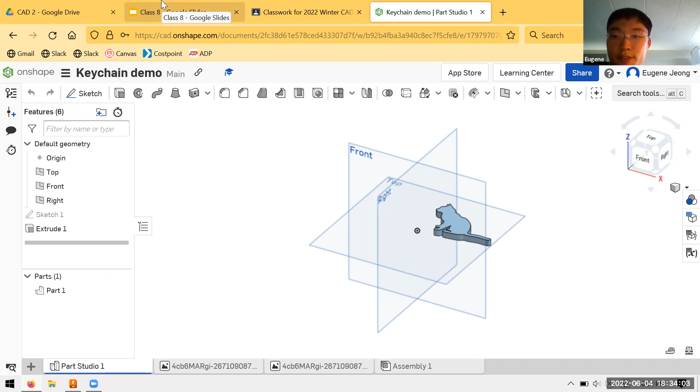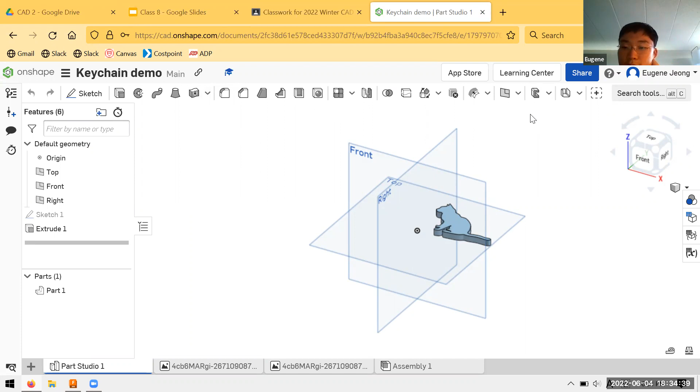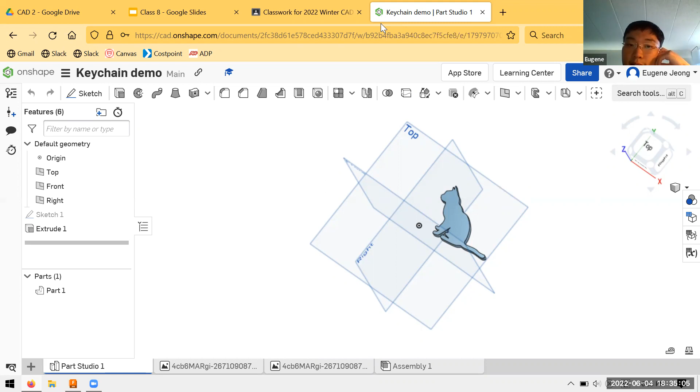All right. So before I get started with 3D printing stuff, I guess there's two of you here. Did either of you have any questions of things you want to see in CAD? It can be like how to use any of these functions, how to make a specific object or type of object, how to do something, anything like that. And if you don't have any right now, you will have another chance later. I expect there will be a bit of time where you'll just be working on the project. So during that time, if you come up with anything you want me to show you, feel free to ask. So yeah, just keep that in the back of your head.

All right, so last week we talked a bit, just starting to introduce the idea of using CAD and things to think about when you're designing a part for printing. Then we talked more about how you should consider using the 3D printer. We're going to focus today more on things specifically that you need to do in your CAD that will make it better suited for actually building it with a 3D printer. The main one there is related to something that I mentioned before, which is your minimum wall thickness. I'll explain a little bit more about some things related to 3D printing, but it'll be a pretty light day.

So we'll start off, if you're not familiar with how a typical 3D printer works, if you're getting something off the shelf, a household, desktop, hobby printer, it probably works by a mechanism like this, known as fused deposition modeling, or FDM. The way this works is the material that you're building the part with will come from a big spool of the base material, whatever plastic, PLA or ABS, and it gets fed into this nozzle here. So the source is that spool of filament, but when it comes out, the size of the deposited material is determined by the geometry of your nozzle. So the size of the nozzle has an impact on the quality and feature characteristics of the part.

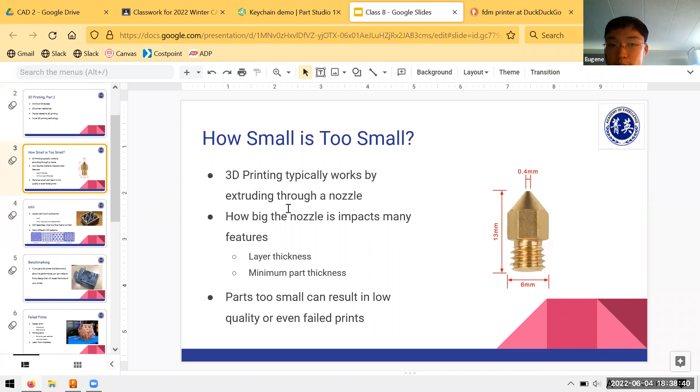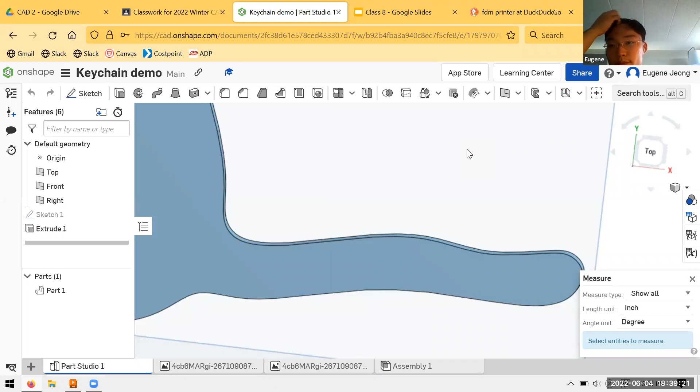So yeah, if you remember a couple classes ago, I showed you the measure tool, which is down here in Onshape. You just want to make sure that the thinnest features on your part have a minimum thickness that is greater than maybe a couple multiples of whatever your nozzle width is. That way, when you print, you'll have enough resolution with those lines to produce a faithful representation of the model, and also enough strength and things like that. Let's see.

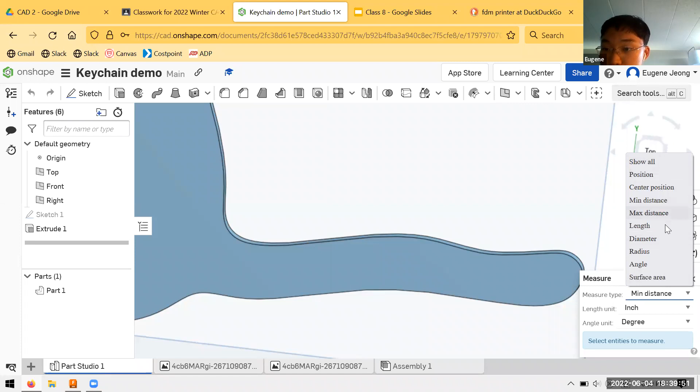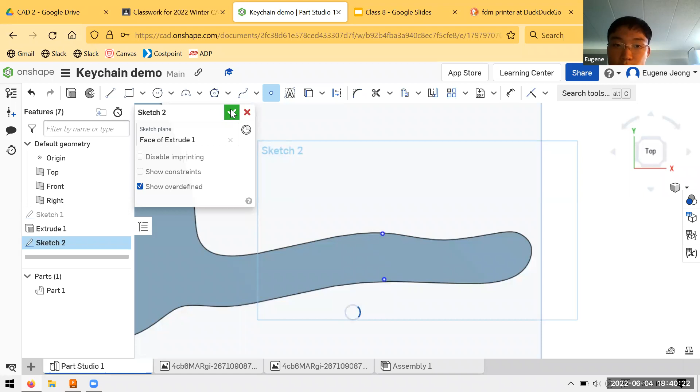So I don't believe Onshape has a simple point-to-point measurement, but if you ever need to know the distance between two arbitrary points, something you can do is just create a sketch. You can plot your points on the part that you want to know the distance between, for example, and if you're actually doing this, you'd make sure to constrain this to be on the part edges and so on.

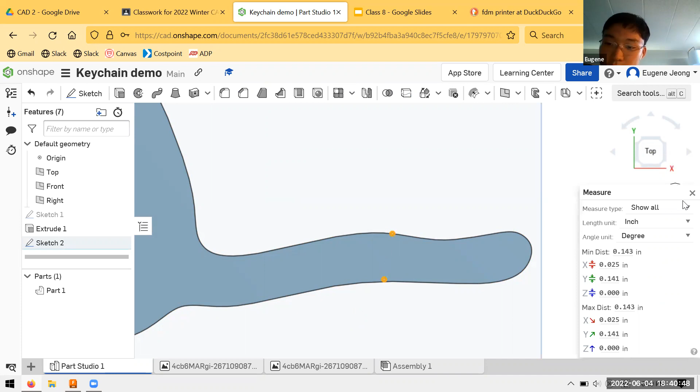And then you can just go back and measure, for example, the distance between these 2 points. There may be a better way to do it. There might be some kind of built-in point-to-point measure type of thing, but in the worst case, you can always do something like that to determine where your thinnest features are.

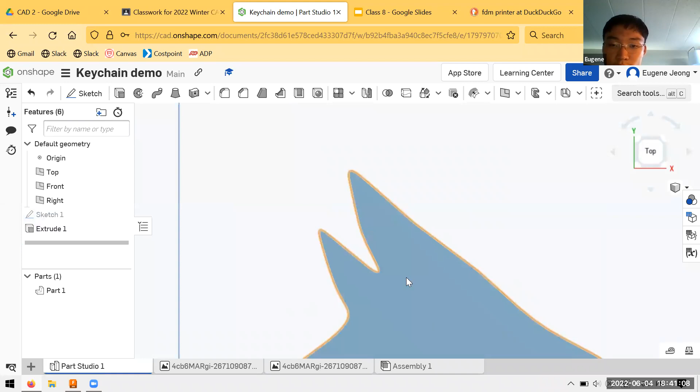Other things to watch out for are these narrow cusps. These might come out okay, but there's a chance around here the material might blend together. Likewise here, as I mentioned before, the ears might be a bit of a problem area.

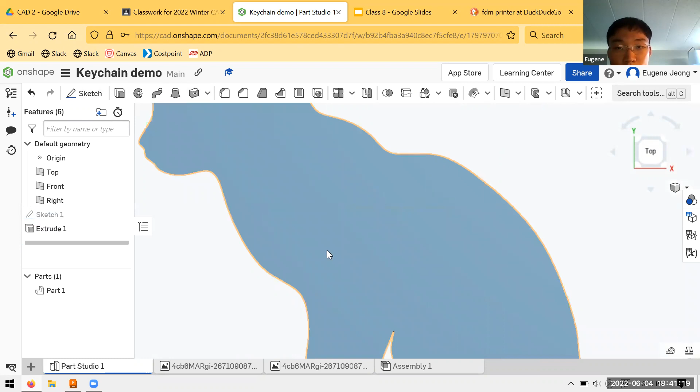And if you're doing things like text, if the text is too small, if, for example, you have some letters and the holes in the letters or the actual width of the letters is too small, then based on the resolution of your printer, it might just come out as a bunch of garbage. It either won't come out at all or it won't look the way that it looked in your model.

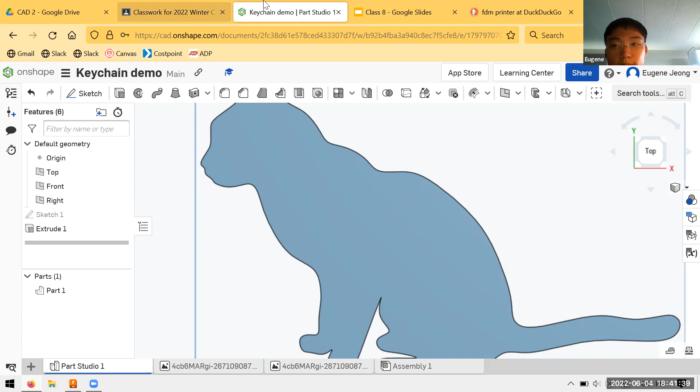All right. Here's something that I mentioned before. When you print something, most of the time, you're not actually going to print things completely filled, because that would use a lot more material than is usually necessary for most things. And it would be a lot heavier, right?

So there are some cases when you do completely fill in your part. For example, if you're going to be post machining or modifying your part after you print it. If, for example, you want to tap threads, which we talked about using a tap, then you would want to have a completely filled section so that there's enough material there to actually create those features.

But otherwise, you'll just have some different patterns inside, which is controlled by that program that I mentioned, the slicer, which is what prepares your 3D model for the 3D printer. It kind of creates a program that the printer follows to lay out all of those layers.

Here are some other things that are good to know about and that you might do if you ever have to operate or manage a 3D printer. One of these things is benchmarking. There are these artifacts that you can find models for. I think on Thingiverse, there are a lot of these print test artifacts that you can find if you search for things like that. The idea is it's a part that has a lot of interesting features that will reveal to you how capable your 3D printer is.

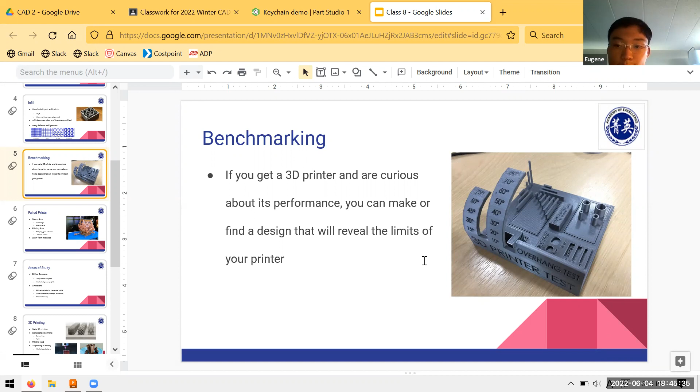Other things, I mentioned this last week, there are a lot of ways your prints can fail, and when it does fail, you might get something pretty catastrophic, pretty interesting looking though.

So there's a lot of reasons why that can happen. Things to look for: you want to identify where the problem occurred. What did you do wrong, and where did you do it wrong? It could have been during the design phase, when you're still in Onshape or whatever CAD program and creating your design. So you want to see, did I design something that isn't very good for 3D printing? Like no matter how I orient it, there's going to be these really severe overhangs. Or is there a feature that's way too small on some part of my geometry? Things like that. And you can consider modifying your design itself in CAD to improve how well and how quickly it can be printed.

Another thing that could have happened is that the error happened under the umbrella of printing error, when you're still in the slicer program. So you've already got your model file, you already have your 3D design, but you're preparing it, you're telling the printer how to print this thing. During that stage, it's possible to make some poor decisions or make some mistakes. For example, things like print orientation. We talked about last week how you want to consider things like which way the layers will be and how that affects your material strength, or how quickly it'll print, depending on if you have a really tall part standing upright or laying flat on the table. So you can have some printing related errors at that stage.

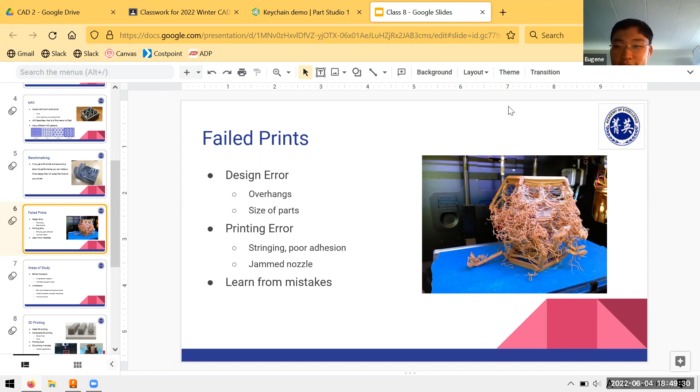All right. If you're interested academically in the idea of 3D printing and things related to 3D printing, there's a lot of controversy, which you may or may not know about. Not everyone loves everything about 3D printing. If you're interested in reading about these kinds of things, you can find a lot of literature and media about 3D printing of weapons. When you can't really control what people make with their 3D printers, of course, there can be some bad actors who try to make weapons with 3D printers.

Another thing is intellectual property rights. You might be familiar with things like copyright law, with patents. For example, the reason you can't find every book ever written online is because of intellectual property laws. And in a similar way that books and people's writings are protected, so also are people's designs. So there's a lot of talk about what we can do about people who try to 3D print things that aren't their intellectual property, that they technically are not supposed to print, but they're able to print nonetheless. As you can see, there's a lot of ethical implications related to 3D printing.

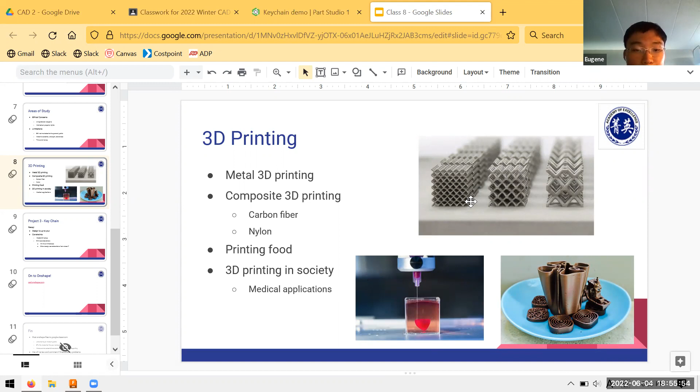All right, so do you have any questions about things related to 3D printing? If not, I'll give you some time just to work on your own on your keychain project. And you don't really have to think of it as a keychain per se. It's just more of a free design project for something that you could potentially 3D print. So I do want you to think about things like your minimum wall thickness and total size. But beyond that, just try to do something interesting.

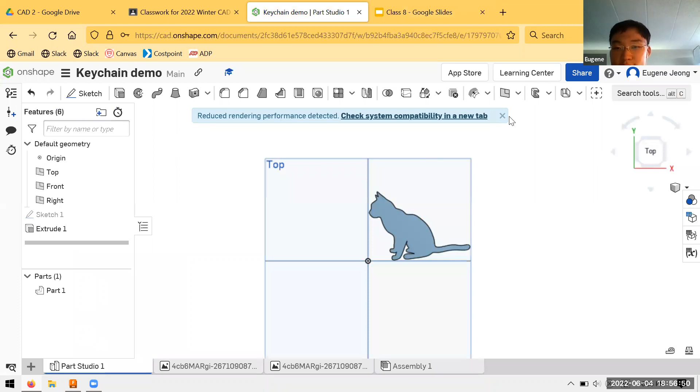Try to challenge yourself. If you're already finished with your keychain or you're happy with what you have, just try to make something. Personally, when I was first starting to learn CAD, what I would do is just look at random objects around me on my desk, things like my computer mouse or my phone, and just try to model those, try to recreate those as closely as I could in the CAD program.

So at the end of the class, since this is our last class, I will spend a few minutes talking about where to go from here, or how you can keep learning. But for now, just try to model something interesting. So I'll give you some time to do that. And while you're doing that, I'll prepare a quick little demo in Fusion, which hopefully works. And I'll also try to upload these slides, which I was having some trouble doing earlier. So work on that for now. Let me know if you have any questions, and I'll be back with you in a few minutes.

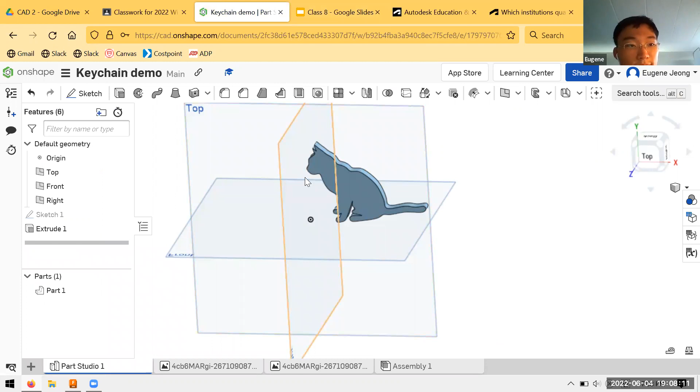All right. So does anyone have any questions about CAD in general, about Onshape? Do you want to share anything that you've made? And it's all right if you don't. All right, so hopefully you're more or less wrapped up with the project. I don't know if the AOE Center has some plans. I guess if you can go there physically, you can ask about possibly printing your part, and whoever's running the printer there can help you with that.

I'm going to take a moment to do a quick demo, and I'll show you an example of how a slicer program might work for 3D printing, and I'll show you a few options that you might have for how you can do CAD that's not Onshape.

So I guess one option, which I'd say is pretty good and should be free to you, is made by a company called Autodesk. So you can just look for Autodesk. They're pretty famous. They have some pretty well-known products like AutoCAD and Inventor, which you may have heard of.

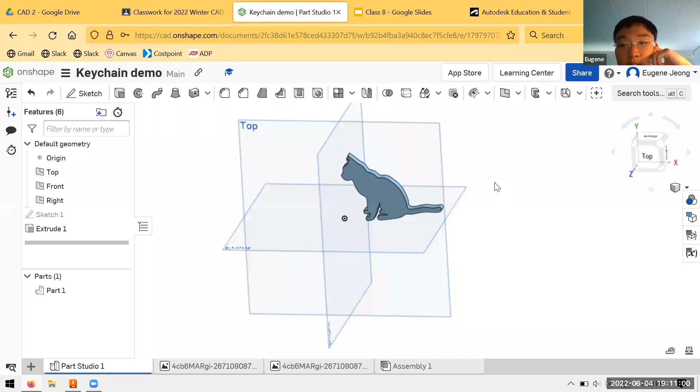Onshape is very unique in that it's all built into the browser. I think it's the only one that has something like that. Kind of think of it like the Google Docs of CAD programs. But in almost all cases, these CAD programs that you'll work in will have their own application, right? They won't be in a browser like this. So if you're interested, one thing you can start out with that's free is Fusion.

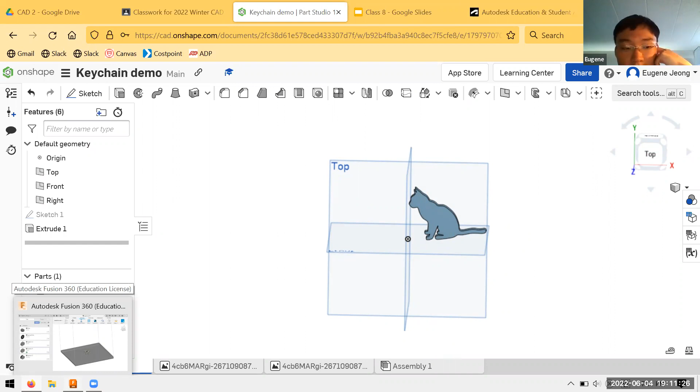So hopefully you can see this on my screen. This is kind of what it looks like in here. I have something up for something else, but Fusion, kind of similar to Onshape, has an integration with the cloud. So your files are kind of stored on their servers. You have access to all your files on whatever device you're using it on, which is different from a lot of other CAD programs, which rely on actual files on your own computer or network. But Fusion is kind of on the cloud.

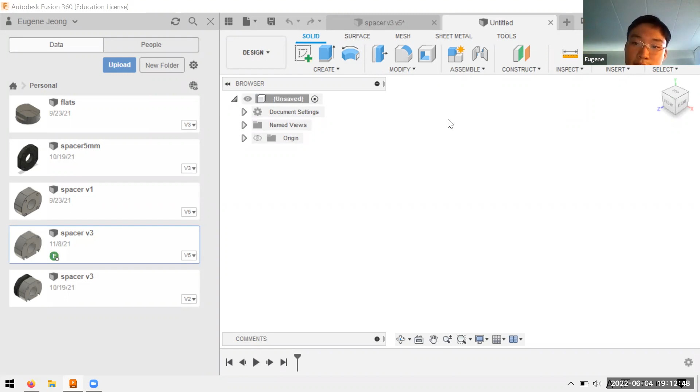So you can see this is kind of the design space. This is my document or my part studio, if you were to compare it to Onshape. So you can see it looks really different from Onshape, but the things that you can do here, the way that you create parts, is pretty much the same. And hopefully this shows you that with the skills you've learned so far, after you learn the basic movement controls and commands, you have all the knowledge you need to continue modeling things at the level that you're able to in Onshape or any other program.

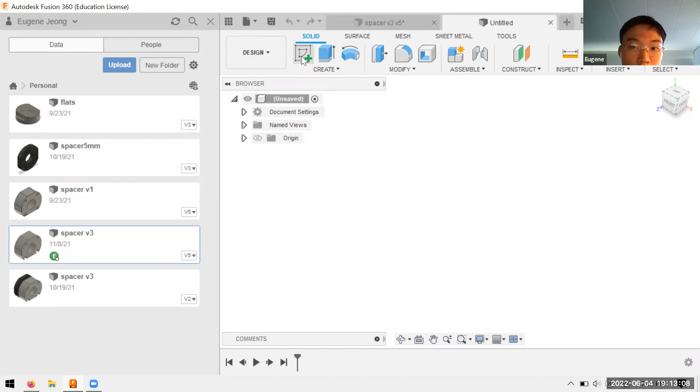So here you can see there's my navigation cube. It looks a little bit different, but I can move things around. I can pan. I can select things, zoom in and out. And so, hopefully this is very familiar. The first thing I can do is create a sketch, same as Onshape. I pick a plane to put the sketch on, and then I have my tools. These should be pretty familiar to you.

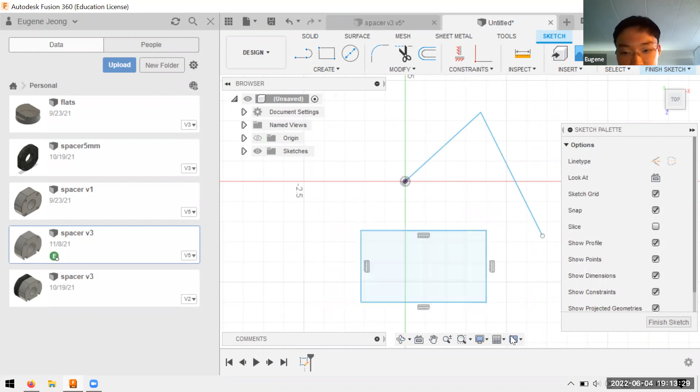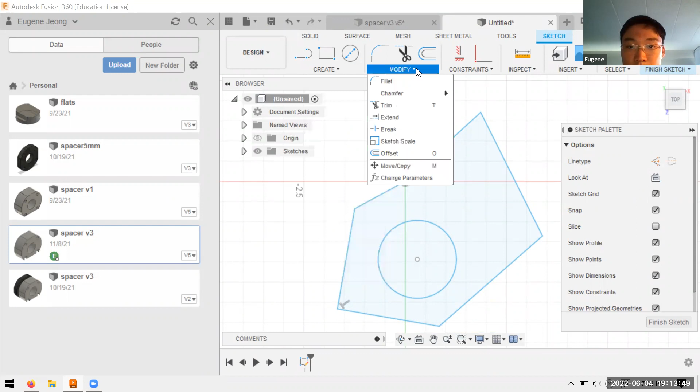This is my line tool, it makes lines. I have my 2-point rectangle tool. It works exactly the same as the Onshape one. I have a circle tool. And as you keep looking through this, there's a whole bunch of tools that are, as a sum, achieving the same thing that you're able to achieve in Onshape, right? So I can finish my sketch.

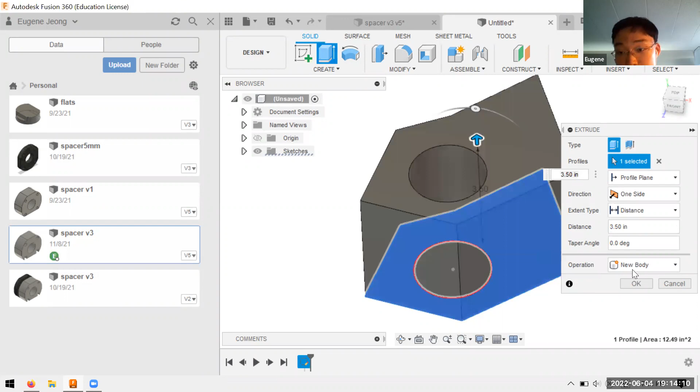Then I go back to my 3D workspace. I have my tools here. Extrude, revolve, they work exactly the same as they do in Onshape. It's just the interface is a bit different. So I select my region or sketch profile, and then I can extrude it to some depth that I want. And that's how I create my 3D bodies. So nothing I did there should have been that revolutionary to you. Everything looks different, but the things that you're doing are the same.

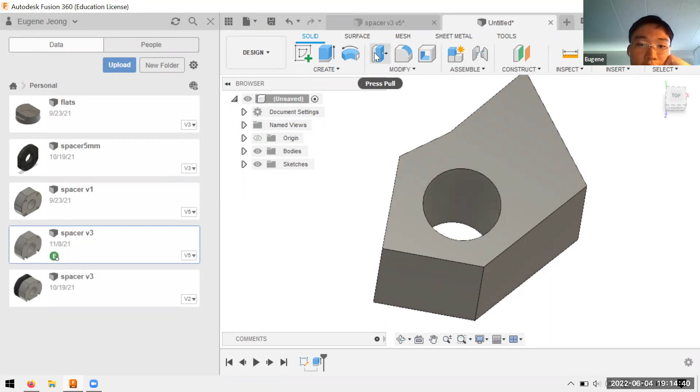So once you start using CAD for school or your other competitions and you're not using Onshape, whether that's SolidWorks or NX or Rhino, Creo, CATIA, there's all different kinds of programs, but more or less they work in a similar way. You can see I have my fillet tool.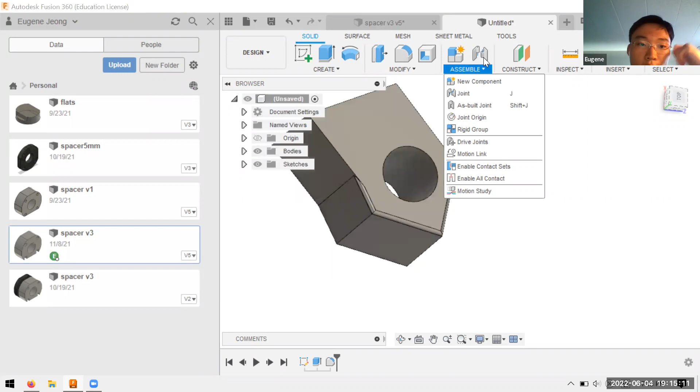It does the same thing, creates fillets. I can do assemblies. The Fusion assemblies, in my opinion, is a bit weird, but it's the same idea where you have, they call it joints, but you're just creating rules. You're creating restrictions on how your components are allowed to move with respect to each other. There's a measure tool, just like the Onshape one, that tells you things like distances.

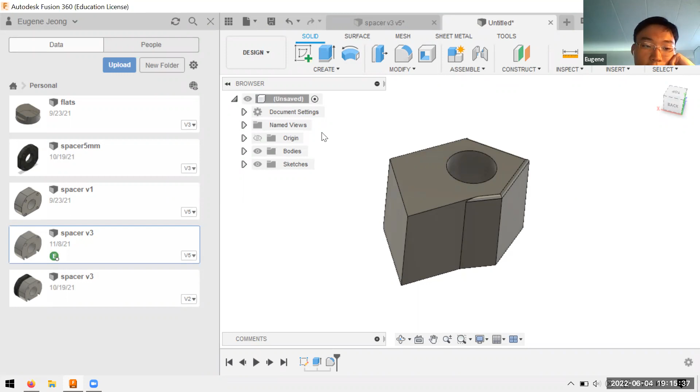So that's that. This is something that you are able to do. As long as you're a qualified student, which I expect you are, you can use this.

One other thing I wanted to show you is how a slicer program works. So one of the cool things about Fusion is that it has built in a pretty solid CAM package, computer-aided manufacturing. So we talked about 2 weeks ago, for manufacturing, if you're trying to program a CNC machine to make your part, you need to create a program to tell the computer what to do. And so I personally did use a bit of Fusion to control CNC machines while I was at school.

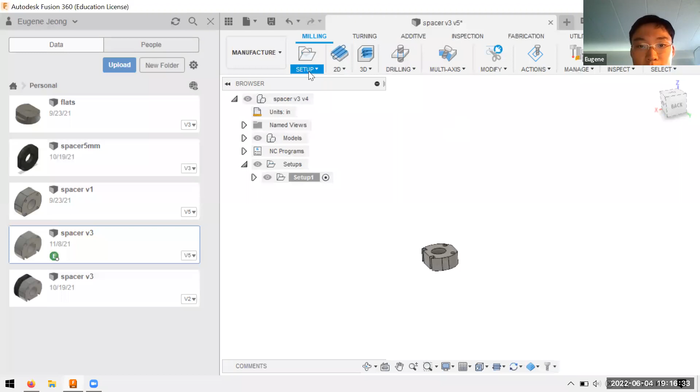It turns out Fusion also has a 3D printing slicer of sorts. So this probably won't be your slicer of choice. There's probably a lot of other slicer programs that might be preferred by whoever owns your 3D printer that you'll be using, but just to show you what it does, just to show you the ideas.

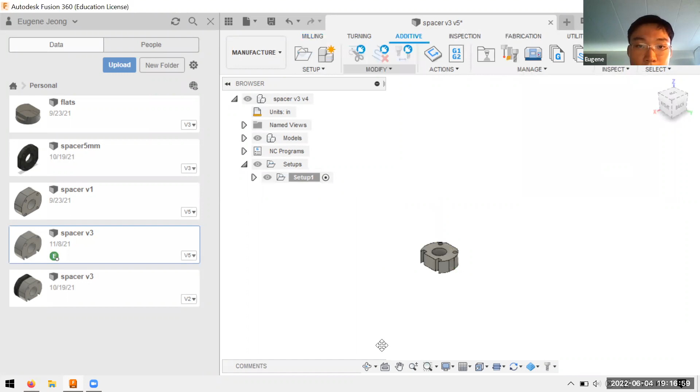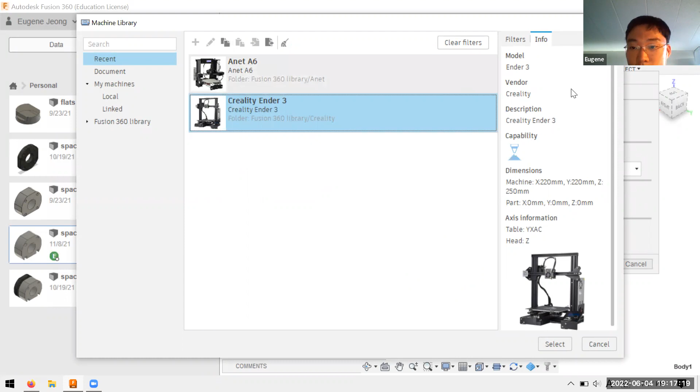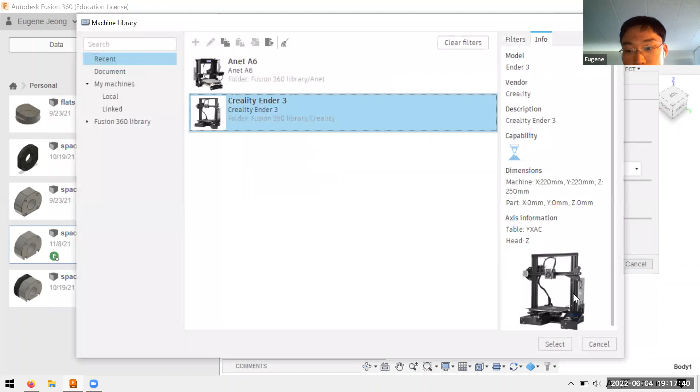I can select the 3D printer that I have. I don't actually have these 3D printers. They're just some default options that show up, but you can either find or create the specs related to the specific 3D printer that you have. And once you do that, whoops, let me do that one more time. I can select it for 3D printing. The operation I'm doing is additive manufacturing. I hit OK, so that creates my kind of work setup.

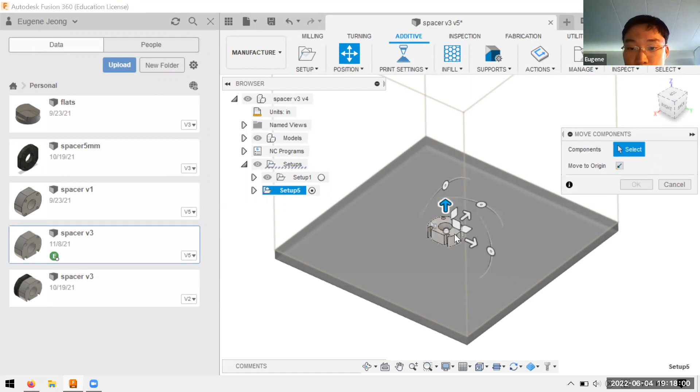And then what I need to do is arrange my part where I want it to be printed on my build plate. So I can move it around. If I'm doing multiple parts, maybe I want it to be off in a corner. I might want to rotate it. For example, if I think mechanical strength is more important in the x direction, if I'm trying to resist blows in the x direction, I might want to print it something like this.

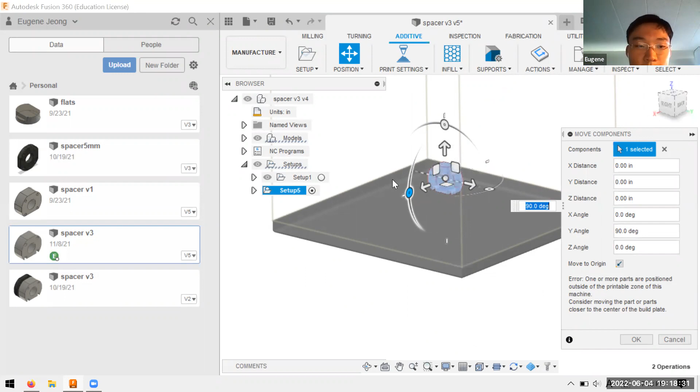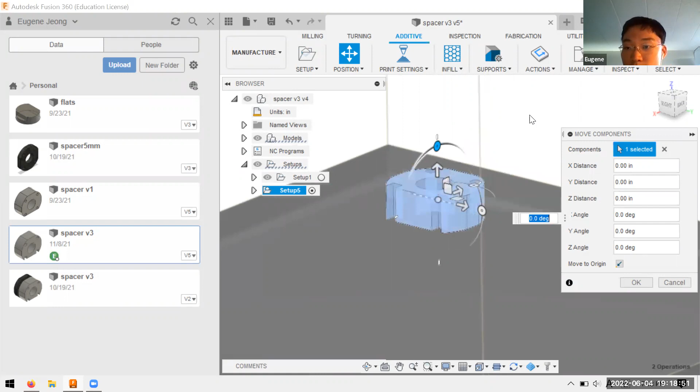But as you might realize, the fact that all these holes and things are here means that the best way to orient this thing is probably lying down on its back like this, because that just means that every cross section is going to be the same geometry, right? So you can move around your part, you can orient it how you want. Then you want to make sure that the part is touching your platform, which for me it is already.

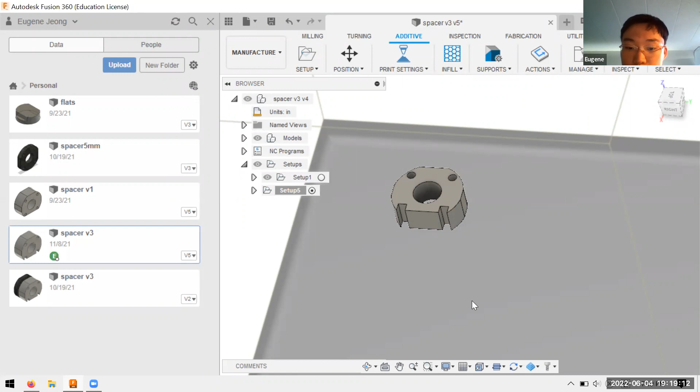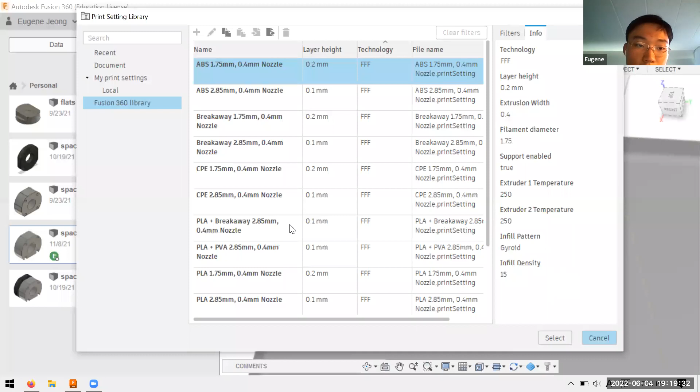You can control things related to your printer. So let's see. Hopefully you can see the dialog box that pops up. You can specify basically a bunch of things that tell the slicer program about your 3D printer, right? Your 3D printer is going to have all these different properties, and the slicer will make various decisions for you when it's creating a program based on what it knows about your printer.

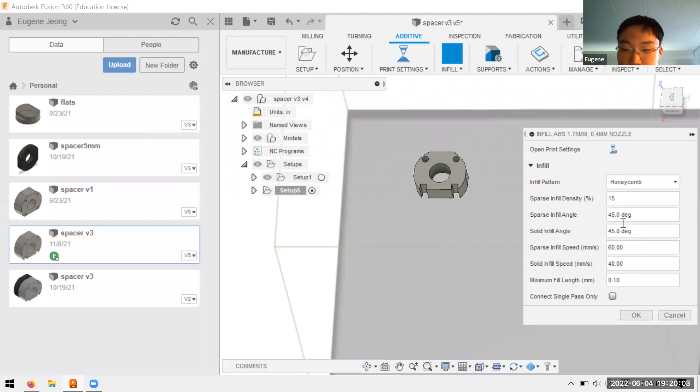Infill is something we talked about. So you can say, what kind of pattern do I want the program to use in the filling shape. So I can specify how densely filled the part should be, the raster angles, things like that. Here, things like supports, rafts, additional things that aren't built into the basic geometry, but still might be necessary for the print itself. I can place supports if I have overhangs.

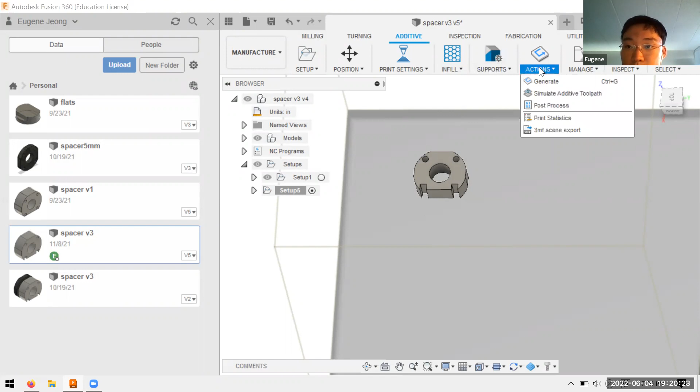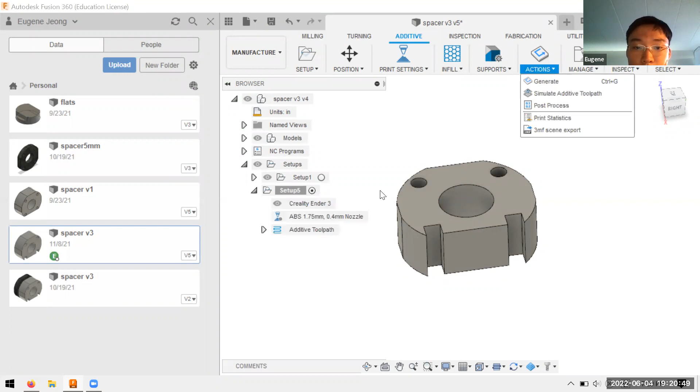And then you just tell it to create a program. And what this slicer program is going to do is generate this code that your 3D printer is then able to accept and execute to print this part. What's neat is that Fusion lets you simulate things, which is really handy, both for the machining thing, and it's pretty cool to look at for the 3D printing thing.

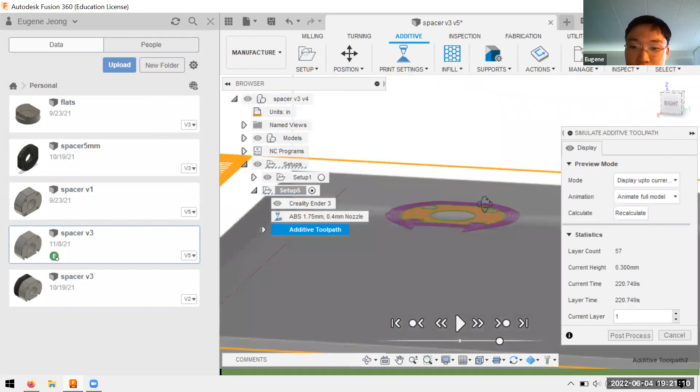So you can see layer by layer how the 3D printer is going to build up this part. And if you've never seen a 3D printer working before, hopefully it gives you a good illustration. It doesn't show the 3D printing head or anything. It just shows you how the printer deposits material. So this is going way, way faster than it would in real time.

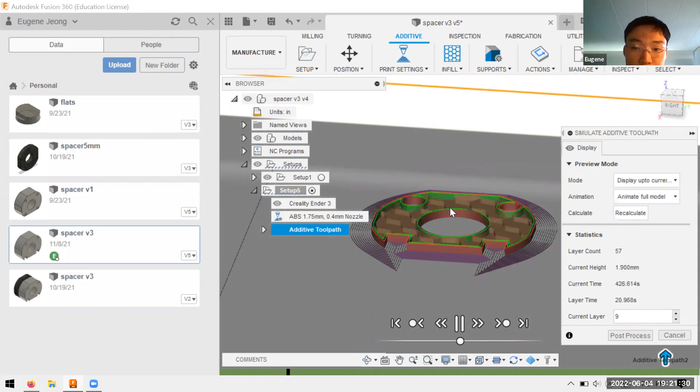You can see every time more material is being added, it's being highlighted. You can see it's just tracing out these shapes. It's filling in the inside with the honeycomb pattern, which I told it to. It's just going up in Z one layer at a time. I'm just continuing to work on this part. And during this whole process, I can look inside and see what's happening.

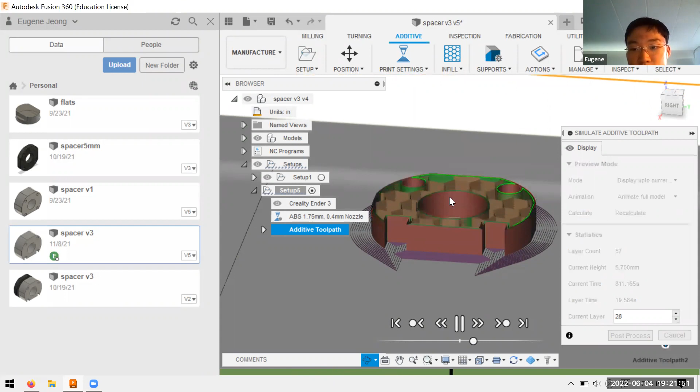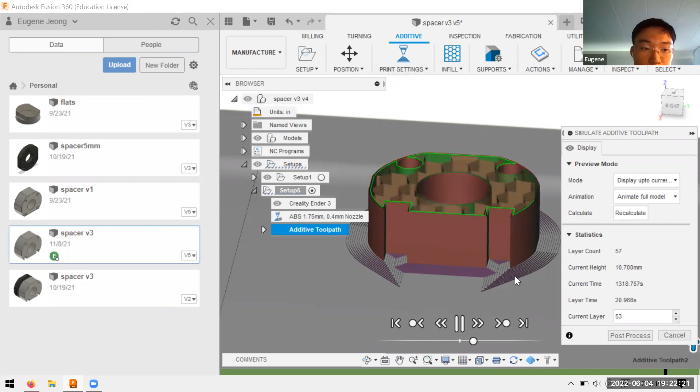And if there's any issues, if something's happening that I didn't expect or don't want, then I can go back and fix my settings in this part, or go back to my design and change my 3D model itself. You can see now it's filling in the top. You can see how it kind of crisscrosses those layers.

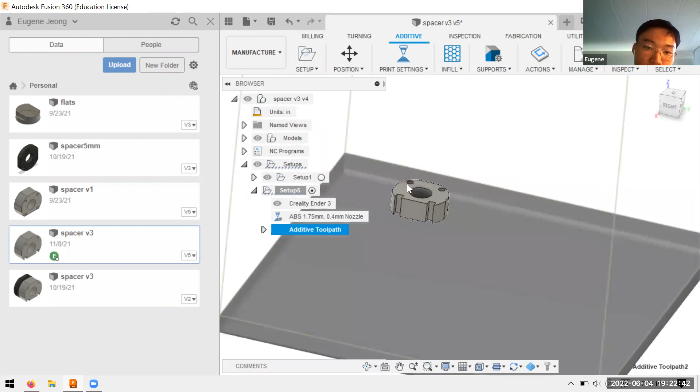But yeah, that's just an example. Most slicer programs, just like CAD programs, are going to look different. They're going to ask you for different things, behave differently, but at the end of the day, it's doing the same thing.

All right. So that brings us to the end of our 8-week session on CAD and a little bit on 3D printing. Hopefully throughout these 8 weeks, if you weren't familiar with Onshape, you learned how to use Onshape. And even if you were familiar with Onshape, hopefully you've built upon and expanded your fundamentals, your basics for how to go from creating a 2D sketch to making a 3D object, combining 3D objects into an assembly,

how to properly constrain things. One of the big things that we hopefully practiced in this class, as opposed to CAD 1, for example, is learning how to look at a drawing and how to recreate the dimensions and things from the drawing. That was one of the goals. And in the last couple of weeks, hopefully you've learned how to design a part that's suitable and could be 3D printed.

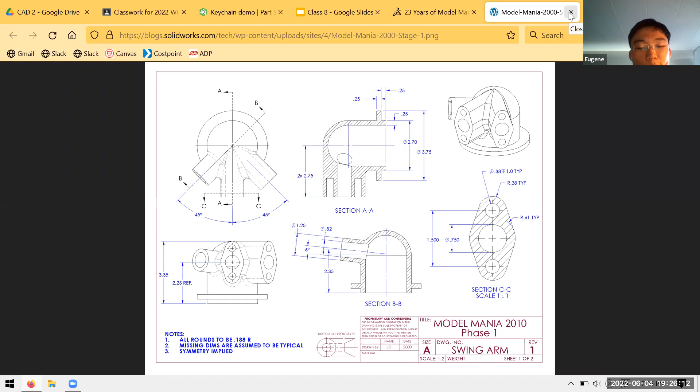So if you want more practice reading these drawings, it's a pretty great way. These are all pretty challenging, but they're all doable, right? Given the tools that you've learned up to this point, you may need a few more tools. You may need to mess around with learning how to use planes and things like that. But there's plenty of information out there, like video guides, books. There are so many resources available online these days that if you're really interested in learning how to use CAD programs, there's really no limit to what you can do.

So hopefully I've given you a bit of a starting point. You know how to use Onshape now, you know where to go from here. You can try exploring different things like Fusion or other Autodesk products that you can get for free as a student. Try to look into your school, see if they offer anything.

But yeah, really the best way to improve at modeling things, doing CAD, is to practice a lot. And that's all I can really say at the end of the day. Just model a lot of things and you'll get better at modeling things. It's as simple as that. As you try to model more complex things, there will be more and more things that you don't know how to do. And whenever there's something you don't know how to do, you can figure it out from some resource or another, and it'll just keep building on.